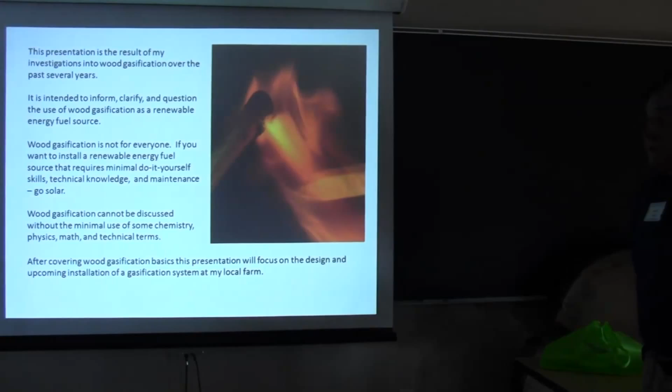This presentation is my investigation into this, and I've done a lot of research into wood gasification, most of it in the European arena. America hasn't done much with wood gasification, and there are no really good scientific, technical articles on it in the US. The National Renewable Energy Lab probably has the best information out, but if you want to research this, look at Norway, Sweden, Denmark, Germany. Europeans have done this for quite some time and really have the technical information about it.

My intent here is to give everybody some information about what this is, what it isn't, clarify some of the terminology related to it, and how this can be looked at as a renewable energy source. If you want to do this, you better be prepared to do a lot of tinkering and build a lot of stuff. This is not something I think the average person can get directly involved with. If you want renewable energy that you can just put there and it does its thing and gives you the feedback, I would say go solar.

Don't do this. All right, so to talk about this I'm going to have to talk a little bit about chemistry, and throw some numbers out here, and a little bit of physics, but I'm trying to keep it to a minimum. I've expressed everything here in both Celsius and Fahrenheit - everything in Fahrenheit is in red numbers, and everything in Celsius is in black numbers.

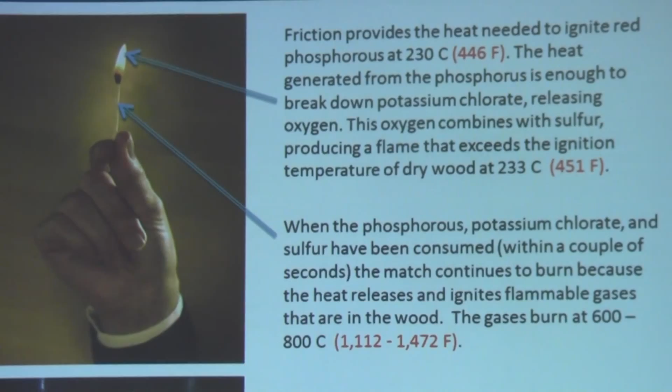So what happened there when we struck this match? For a long time, people didn't have matches - it was quite a lengthy invention, actually. It took 100 years to come up with the chemical compound for the tip of that match that allows, when you make that strike on that box, enough friction to produce enough heat to ignite the phosphorus that's on the head of that match. And that phosphorus then ignites what's called potassium chlorate, heats it up, and releases oxygen.

Because we're just shy of the temperature at which wood ignites, which is 451 degrees, and I'm sure we all remember the book Fahrenheit 451 - okay, that's where that came from. That's the temperature at which wood will spontaneously ignite.

So we strike this tip of this match, we produce enough heat to get this wood to burn with oxygen. But that is not enough actually to sustain this burning. What is happening then is that the heat produced from the striking of that match heats this wood up enough that the gas contained in that wood is being released into that flame. The flame on that match as it was burning here is roughly in this range, 600 to 800 degrees centigrade, or 1100 to about 1500 degrees Fahrenheit.

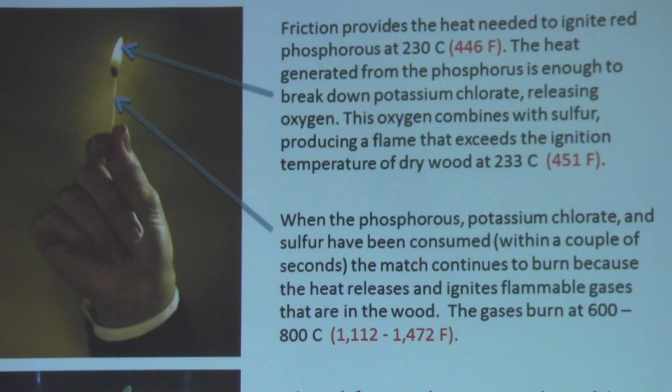Another example of that that's kind of interesting, you may have seen this. This is a common candle. Anybody know what the wick of that candle is made out of? Cotton. Okay, gasification can occur with any biomass - doesn't have to be wood. Wood happens to be one of the better ones, but cotton will work also. So we have paraffin wax surrounding that wick.

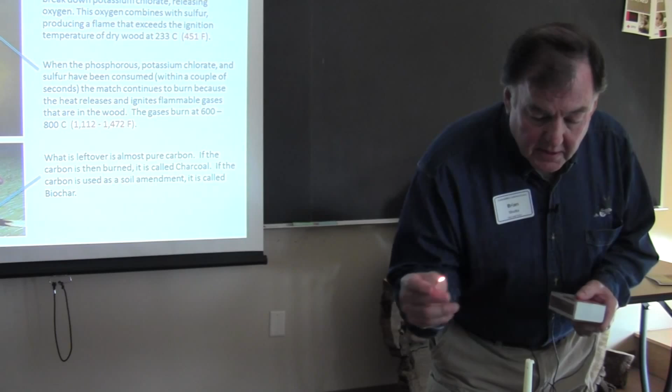The flame is burning - is that flame burning the cotton, or is that flame burning the paraffin? You sure? Okay, let me get it. It ain't coming up high enough. No, let's try it again. I think there's too much breeze in here.

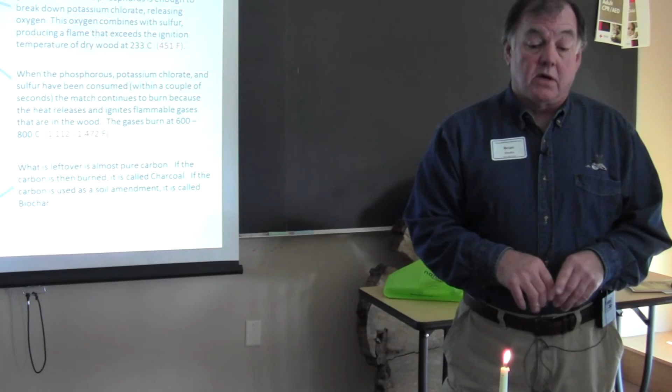Okay, so I reignited that candle without touching that wick. How'd that happen? The gas, same gas that was coming off that piece of wood, is coming out of that piece of cotton in that wick when I extinguish that flame. And that gas is flammable enough - I've gotten it, if you get in a real still condition, I can get about 2 inches away and reignite these candles like that. So we have gas coming here from both the paraffin and from the wick.

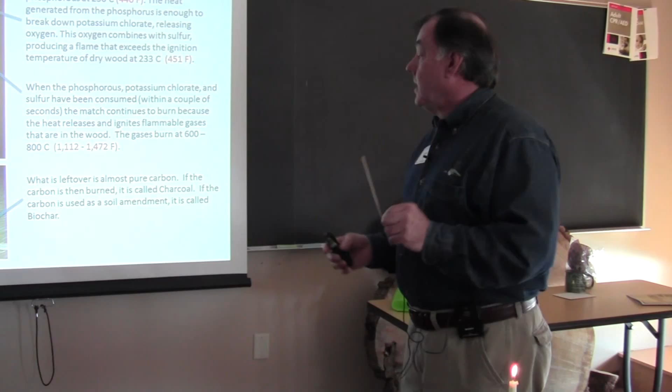So what's left over? We took that piece of wood, we ignited it, we baked it, we got it hot enough to release gas, and what's left over is this black char. Now depending on what you use that char for, it's got a couple of different names. If you're going to then burn the char, which is flammable, it's called charcoal, and we've all used charcoal briquettes. If you're going to use it in the ground as a soil amendment, that's called biochar. They are exactly the same thing. But you hear the word biochar now being used a lot - but it is charcoal.

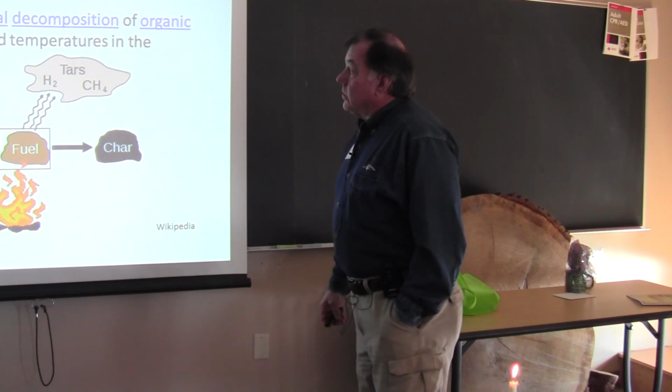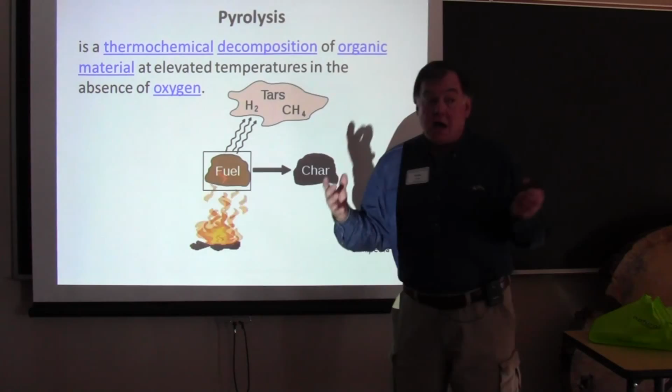So the chemical process here is called pyrolysis, and it is a thermochemical process, meaning it is a chemical process that is driven by heat. And we are decomposing that piece of wood rather quickly at an elevated temperature, and the best way to do it is without oxygen. Now obviously that match is drawing oxygen from around the room - the flame is actually keeping the oxygen away from the wood. So we have a heat source, we have a fuel source, a piece of wood. We'd like to put that fuel source inside of a box, an oven, and we'd like to heat it up and bake it.

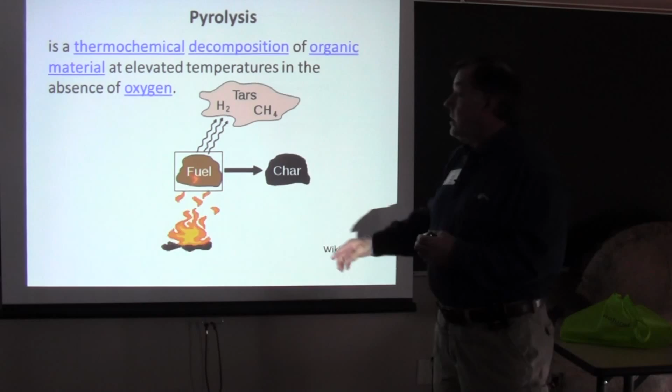And as it gets hotter and hotter and hotter, that piece of wood starts transforming. And when it transforms, it releases several substances. It releases some substances that are liquids - we call those tars. It releases some substances that are gases - those are the ones we're interested in right now. And then it also has a byproduct of biochar, most of the time, not all the time. We'll cover that in a minute.

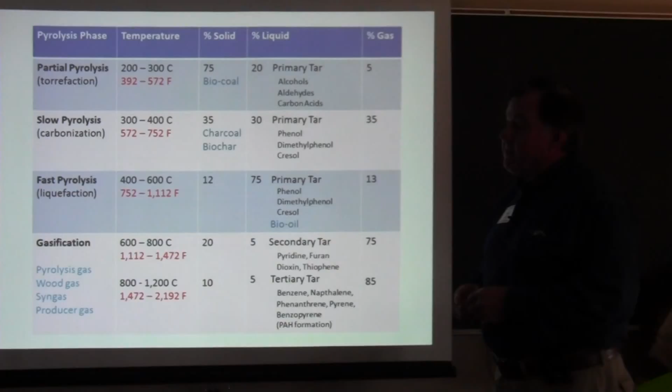So here's where it gets a little technical, but I'm going to refer back to this particular slide a lot, so we need to spend a little time on it. At about 200 degrees centigrade, or 392 degrees Fahrenheit, pyrolysis starts happening. This piece of wood that we're baking starts transforming, and in that temperature range it remains basically a solid, 75% of it, and it starts producing tars - liquids start coming out of it. These are the names we give those tars when we're in this particular temperature range. It also starts releasing gas, but not very much of it.

So we turn up the heat a little bit and start baking it at a higher temperature. The next phase is called slow pyrolysis, roughly 300 to 400 degrees centigrade. At that temperature range, we start producing a lot of charcoal, 35%, and we start transforming it less into a solid piece of wood and more into tars and gases.

So this phase is pretty equally split. These are the names of the gases, or liquids I should say, that we get here. We probably recognize one of these. Creosote? Okay, so cresol is the precursor to creosote, the basic chemical substance of creosote.

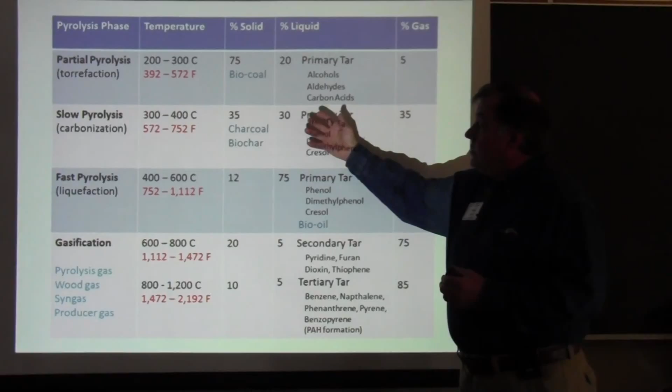So the chemical industry pyrolyzes wood at different temperatures depending on what they want to get out of it. If they want to extract oil out of wood, they use these temperature ranges. If they want to extract biochar or gas, they use different ranges. We're concerned with gasifying this piece of wood and using the gas, but at the same time we'd like to minimize the amount of tar and charcoal left over. We'll hit on that in a minute.

So let's go up one more step. We keep turning the heat up on this piece of wood and get up into the 600 to 800 degrees centigrade range. At this range we start producing what are called secondary tars. A secondary tar is a tar that you cannot detect. If I gave you a piece of wood and did a chemical analysis on it, you would not find those tars in it. Those tars are created out of these tars going through a chemical transformation due to the heat.

But we start producing a lot of gas, 75%. So that piece of wood is now being converted to a gas, and we'll look at that gas in a second. So let's keep cranking it up here, a little bit more.

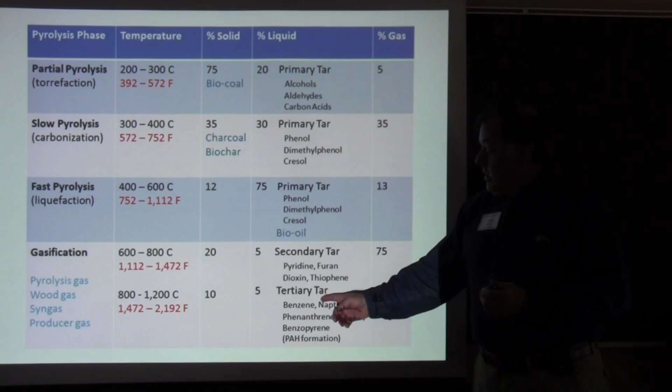Anybody know what the word tertiary means? Third. Okay, so we're producing now another level of tars that were not in that piece of wood. You could not detect them—the heat is creating them out of the existing tars. These are called tertiary tars.

And you may have heard this phrase—we'll cover it at the end—called PAH. Anybody know what that means? Okay, we'll hit it at the end. But these are the bad guys, the ones everybody doesn't want to create because of the amount of cancer-causing agents that are in them.

So there's kind of a sweet spot in this whole process of taking a piece of wood and pyrolyzing it into a gas, and in my opinion that sweet spot is right here. Because what we'd like to do is create the most amount of gas, the least amount of tars, and some amount of charcoal or biochar, without an excessive amount of ash created in the process. So I'm going to refer back to this—try to keep in mind the temperature ranges we're talking about and what's achieved at each one.

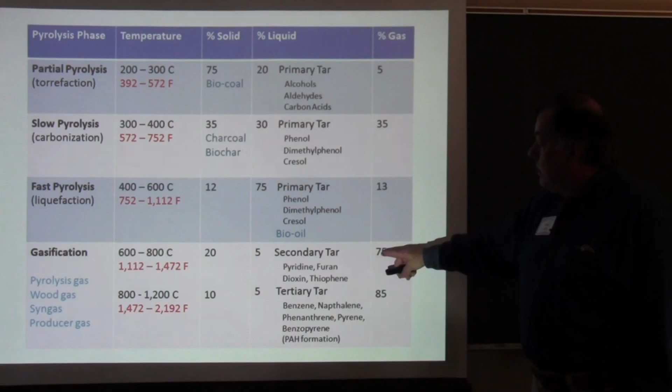So let's look first at this spot right here. The rest of this presentation will be on what we get if we gasify at this temperature. When you say tar, what do you mean by that? Okay, let's go to—I'll show you in a second.

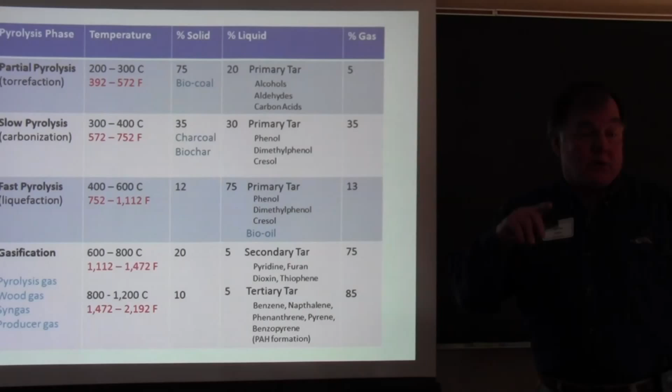Let's look at the gas first and then we'll look at the tar. So wood gas, that's one of the names for the gas. Let's back up one sec. There's a bunch of different names, and if you read all these studies, everybody doesn't use the same terminology. That's a big problem with this whole field. So when they say we're going to make a gas out of this wood, some people call it pyrolysis gas, wood gas, syngas, or producer gas. They are essentially all the same thing.

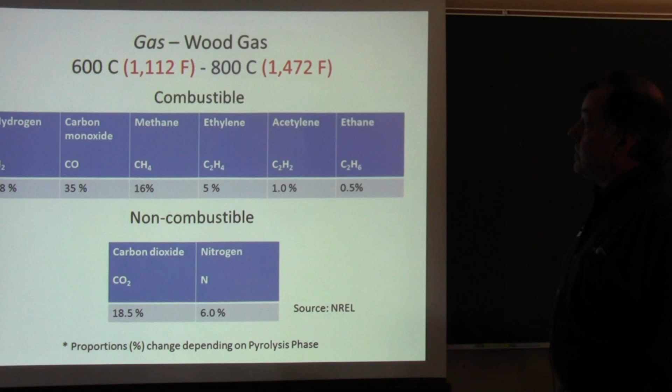So what does wood gas look like at that temperature range? This is what it's composed of. We talk about hydrogen cars and the hydrogen economy and hydrogen renewable energy. Wood gas has a lot of hydrogen in it. Carbon monoxide is a flammable gas. Methane, same thing you produce in natural gas, biodigesters, is another major constituent. Some other gases that aren't real prevalent but are very powerful are ethylene, acetylene. Where do we use acetylene at?

Welding, right? Is that the same for different tree species? The chemical properties that you get from burning different tree species will produce different percentages of this. This is based on a hardwood, a dried hardwood. And it's another whole science, what wood you put into your gasifier and what kind of gases you get out of it. And then there's also ethane in here.

So those six gases combined are what cause the combustion in wood gas. There's also some non-combustible gases that come out: carbon dioxide, about 18%, and nitrogen, about 6%. This came from NREL, their studies on wood gasification. Remember, this is at this particular temperature range. If you gasify at the other ranges, the same gases come out, but the proportions are changed.

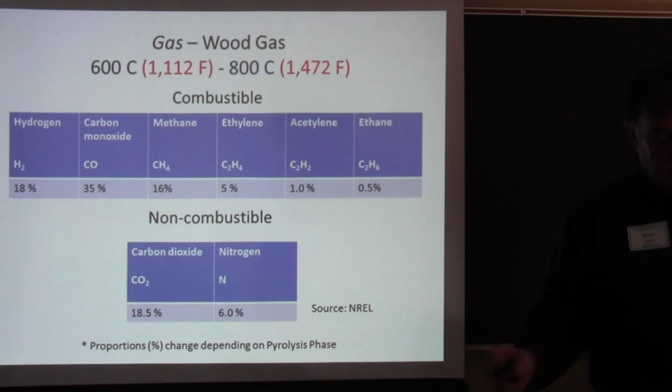So what is tar? Tar is the liquid that comes out. Remember, we're doing these different temperature ranges, starting down here at 200 degrees centigrade, and we're going to stop here at about 600 degrees centigrade. So if I take a piece of wood and cook it at about 200 degrees centigrade, the tar I get out of it is basically lighter than water. It's an oil, lighter than water. The main one we're all familiar with, there's a bunch of them, is turpentine. So that's how the chemical industry gets turpentine out of a piece of wood. They pyrolyze it at a low temperature, and that turpentine comes out.

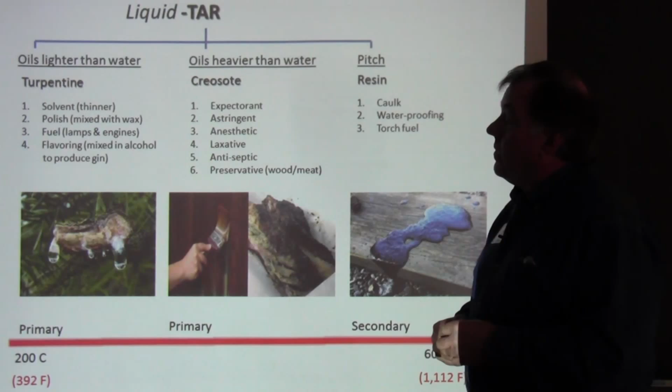So what do we use turpentine for? All kinds of things. It's been a solvent for a long time, a paint thinner, a polish. It's mixed in with wax. It's been used as a fuel in lamps and engines, and it's been used to flavor gin. In fact, for a long time, gin was made that way.

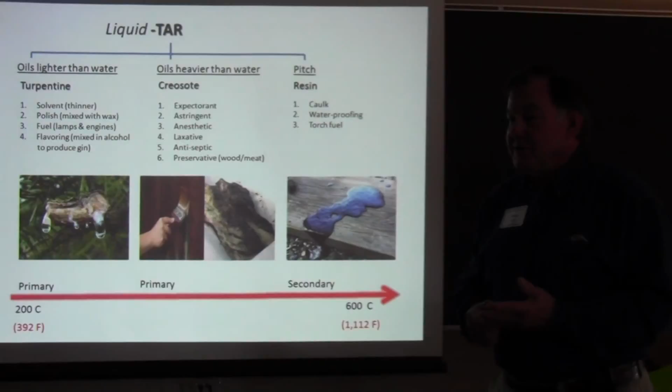So let's look at the one for engines for just a second, just a little fun thing on the side. When Honda made his first engine, his own engine of his own design, he ran it on turpentine. So when Henry Ford made his first engine, anybody know what he ran it on? Alcohol. Okay, when Rudolf Diesel made his first engine, what did he run it on? Vegetable oil, peanut oil in particular. All naturally derived substances. When Ferdinand Porsche made his first Porsche, what did he run it on? Electrons. The very first car Ferdinand Porsche ever designed was an electric car.

So if you look at those four, the leaders in the automotive world, and you look at what they thought they were creating, they all envisioned that they were creating an internal combustion engine that would run on a renewable fuel source produced by farmers in particular. Their concept was never that they were going to be run on fossil fuels.

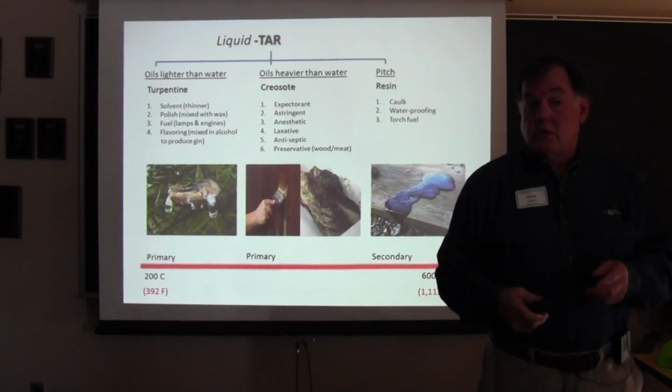So, low temperature, we get turpentine. Turn up the heat a little bit here, and we start getting those oils coming out, cresol, creosote. Creosote's been more than just a bad thing going up our chimneys, though. It's been used as a drug for a long time, and in Japan is still marketed and sold as these drugs. It's also been used as a wood preservative and a meat preservative. In fact, you can buy bottles of creosote that you can put on meat.

The EPA, if they had their way, would bar all of us from ever eating anything that looked like this, because they say that all the bad stuff in eating a piece of meat—you've all heard this about not eating charred meat—is that the charring on the outside is the creosote that's in the meat or been applied to the meat. So we turn it up a little bit higher, and we're still up here.

We're just starting into this secondary phase of tar production, and we start getting this thick, gooey stuff come out, commonly called pitch. We used to be able to buy pitch in cans. We used to use pitch in place of tar to fix our roofs, things like that. It's used as a caulk, for waterproofing. It's soaked into cotton and used as torches, hand torches.

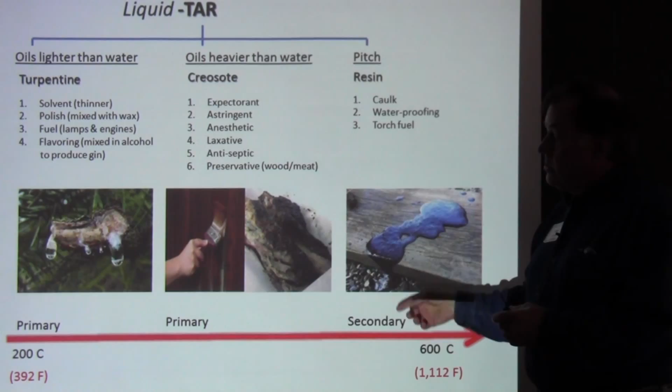So those are the tars. Industry likes to have tars. The application I'm going to talk about here in a few minutes is application of wood gas in an internal combustion engine. Internal combustion engines do not like this—they do not want it going into them at all. So if you are processing wood at this temperature range and producing these kinds of tars, they will quickly destroy an internal combustion engine. In fact, to even begin to use them in an internal combustion engine, you have to take those tars out. So you have a gasifier, and it's going through a filtration system to remove those tars before it goes into the inlet of that engine.

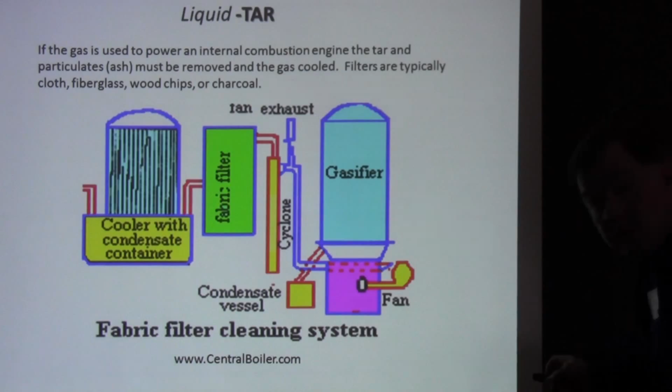So the other thing that comes out is the solid—I broke it off, the char on the end of the stick. And people are using it as a soil amendment. Biochar is looked upon now as one of the best things you can add to the soil to improve its fertility. It also stores carbon.

So if we back up to that chart I showed you, at the temperature range that I'm talking about here, how much char did we have left over? I think it was 20%. So if I put 100 pounds of wood into my gasifier, I'm going to get about 20 pounds of charcoal or biochar out of it.

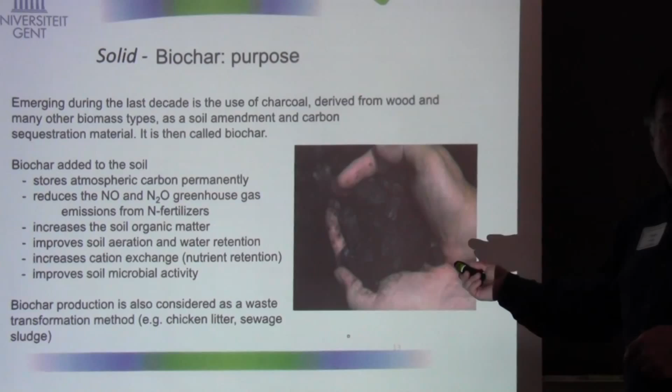What can I do with it? Well, I could burn it. I could use it as a filter media—we have all kinds of filters that use charcoal. Or I can put it into the ground. In the ground, it does some very interesting things. This is carbon, pure carbon—carbon that didn't go into the atmosphere. It's carbon left over from the wood, and we're going to put it back in the ground.

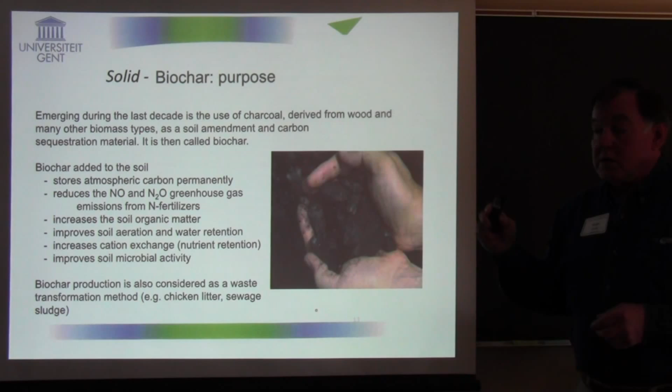When it goes into the ground, it does a few things. One of the things it does is it immediately locks up nitrogen that's in the ground. And I've read several studies that say that one of the ways we can improve our factory farming is to put more biochar into the soil, to lock up more of the excess nitrogen that's been applied and that is running off.

It increases soil organic matter, aeration, and water retention. You know, charcoal is basically like a sponge—it has lots and lots of surface area in a very small space. It locks up other compounds inside of itself, and the soil microbes like that. It's all right there where they can get to it.

So biochar is a byproduct. You gasify at different temperatures. If your goal is to produce biochar, you're going to do it at a lower temperature. You can produce more of it, but you're also producing more of the other things—the tars and the gases.

So how do we gasify? Well, it can be as simple as take a can, put a bunch of wood in it—wood chips, sawdust, a chunk of wood—put a lid on that can, make sure it's metal, and put it in a fire. It will bake that piece of wood and release the gas out of it. And when you get done, you'll have a black chunk left over.

Right now my son is experimenting with packing a steel tube about that long, about that big around, with sawdust, with a steel lid on it. He puts it in a wood fire, and you can see the flames come out of the cracks of the lid—they'll shoot out the side of the lid that far. Leave it in there for an hour, maybe two hours, and the wood—or sawdust—that was packed in tight will have reduced down to about 60%, and it'll be fine black charcoal.

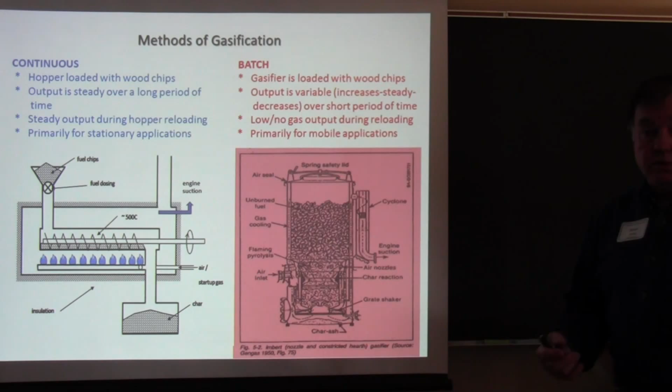So that's the simplest way to do it. There are other ways of doing it. The problem is that when you pack that container full and put it in the fire, it produces gas until the gas is gone from the wood that's in there. Then you have to recharge it—take it out, dump it out, pack new sawdust in it, and put it back in. That's called a batch process.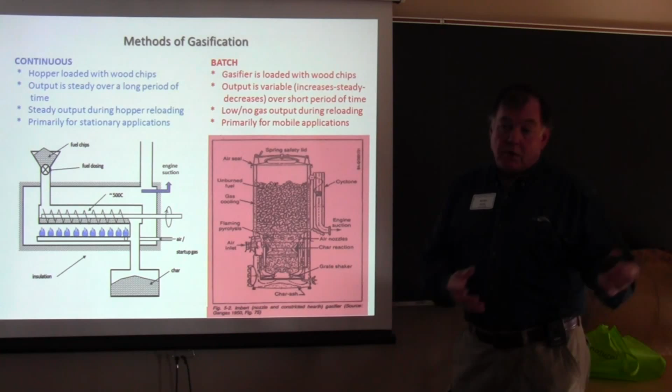We're doing a batch at a time, like baking a batch of cookies. So the batch process is where we load it with a quantity of wood. The output is variable because while we're unloading it and reloading it, no gas is being produced. We put it in the oven, gas production starts going up, levels off, and then we have to recharge it again so it drops down. That's called the batch process, used mostly for mobile applications.

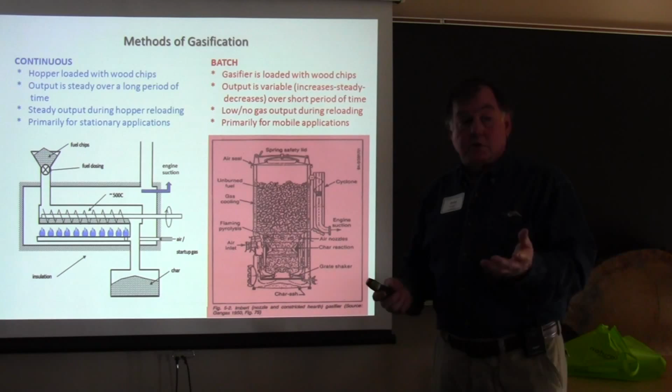A stationary application has the advantage that you can use what's called the continuous process. You can feed these wood chips into the gasifier at a steady rate, just like fuel oil flowing out of your fuel oil tank into your fuel oil furnace at a steady rate. The one we're going to look at today is this one. I want to show you a few examples here.

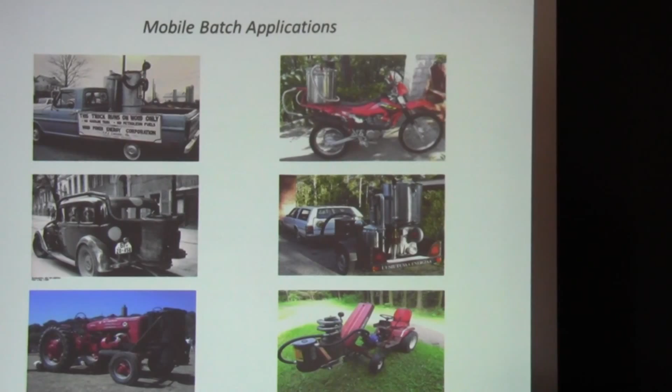This is gasifiers being used for transportation purposes. If you read Mother Earth News or any technical magazines, there are all kinds of articles now about putting gasifiers on vehicles. It was really prevalent, reaching its highlight at the end of World War II because we severed most of Germany from having any fuel supply. People got very crafty, and I've read that as many as 50% of the war vehicles at the end of World War II were being run on wood gasifiers because they had no other fuel to use.

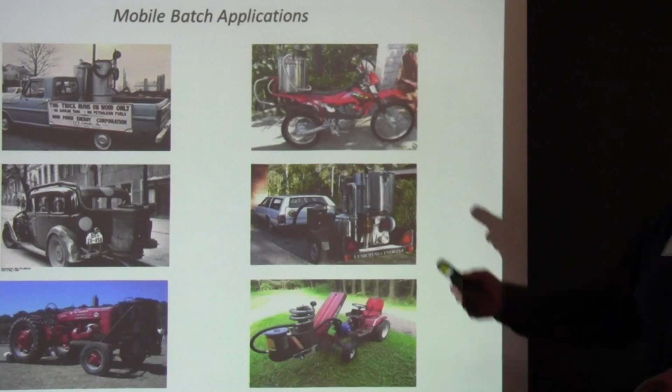So they put a tank on the back, a tub, packed it full of wood, put some wood under it, used that wood to heat the wood in the canister, ran a tube up to the front of the vehicle, sucked it into the intake manifold, and drove down the road.

Some modern versions of that involve putting them in the back of pickup trucks. But you'll notice that by the time you load some wood in the back of that pickup truck, it's not much good for anything else. It takes a lot of space on a mobile vehicle to do wood gasification and drive down the road. They've even done it on motorcycles—I would not want to lean back on that motorcycle.

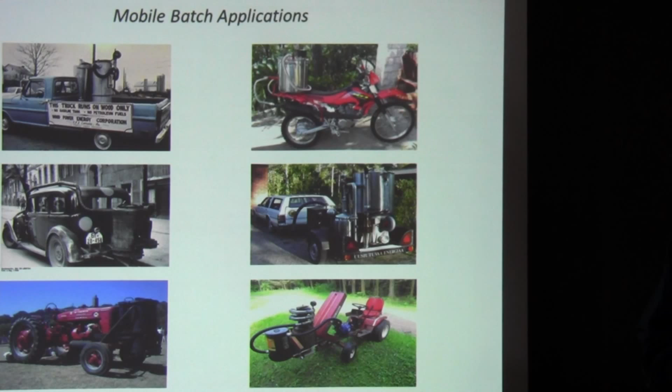This is kind of a modern version of this. It's all self-contained on a trailer with a tube running up underneath the car to the intake manifold, so you can drive around. I could possibly see it on a farm application where you're not driving on the road and don't have to worry a lot about having trunk space and how convenient it is. And this is a garden tractor that has one on it.

One of the reasons they could do it back then, which is kind of interesting, is that during World War II, most car engines were of what's called the flathead design, not overhead valves. The valves were in the block.

And remember all those nasty tars I was telling you about? Well, they weren't doing much to filter those out, so they were sucking all these tars into the engines along with the gas. After a while, the engines would quit turning because they were gummed up inside with tar. To service a flathead engine, you just take the bolts off the head and pull the head off—it's right there, all the valves are clearly accessible, the head's accessible. I've read that they were pulling the heads off of these cars once a month and cleaning the tars out of them to keep them running.

So think about that if you're thinking about doing an engine application.

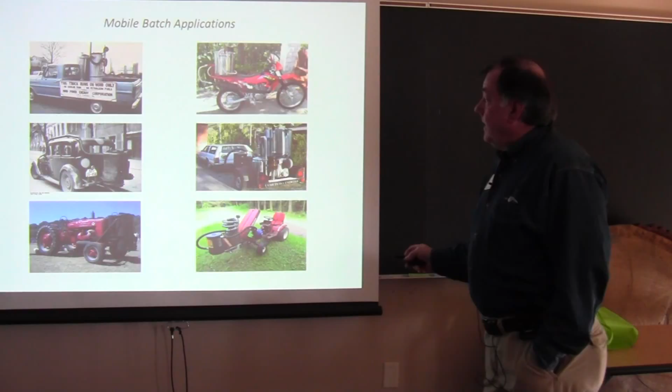How many people have an EPA-rated wood furnace?

You may have read recently that about two weeks ago the EPA announced that rated gasification wood furnaces have been on the market since 1988, and they're now trying to make it so no manufacturer can produce a wood stove or furnace that doesn't meet these qualifications. They're getting a tremendous amount of pushback on this.

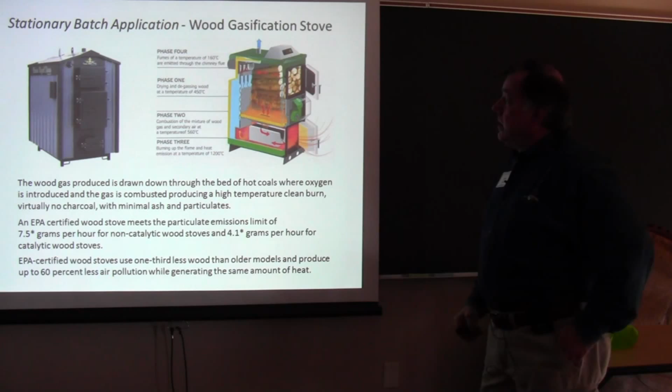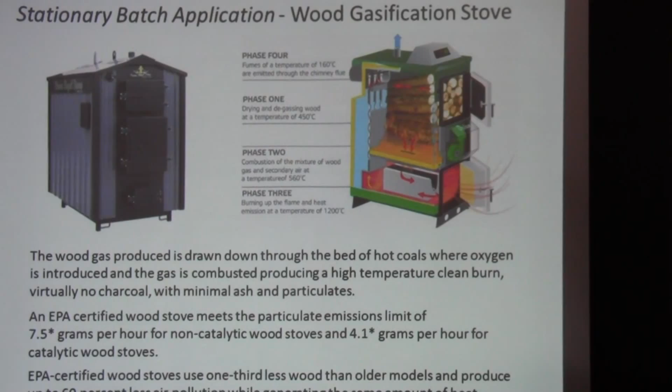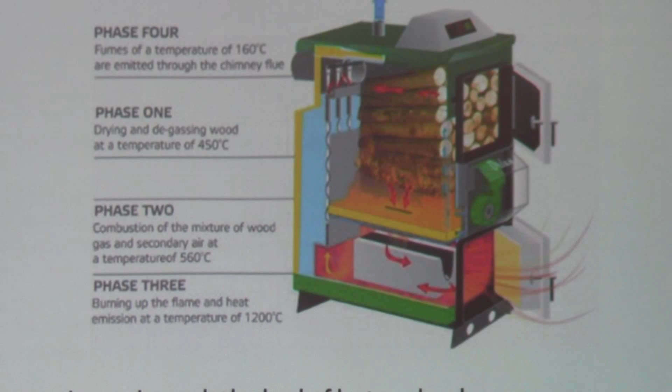So how does an EPA-rated wood stove work? Essentially it's a batch process. You load a bunch of wood in, get it burning, and the bottom part is on fire, then you choke it off, cutting off the air and preventing it from escaping into the atmosphere. The gases that come off the wood accumulate inside the stove. At a preset time, a fan turns on that sucks those gases out of the chamber, down across the glowing embers, introducing oxygen at the same time, and burns those gases, which then goes out the smokestack. An EPA-rated gasification wood stove is far less polluting than a common wood stove and uses about a third less wood to produce the same heat.

They also cost $1,000 to $2,000 more to buy new, but they like to see everybody who burns wood have that on their stoves. So in this case, we're just taking the gas and sucking it back down across the fire.

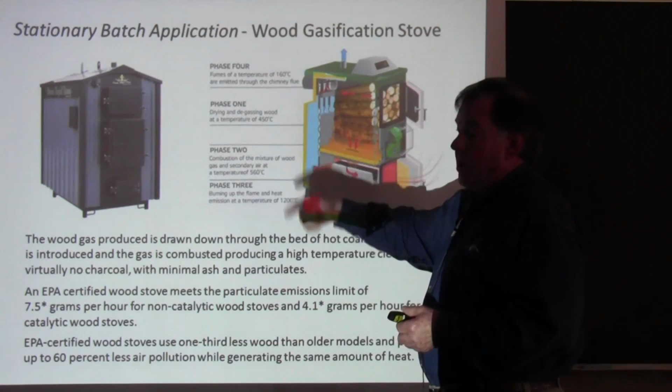What is the heat exchanger? Most of these have coils in the back part, where the heat, as it's going out, heats the water inside those coils and circulates it back to the house.

So this is a stationary, continuous application. How can we make this run continuously for a long period of time? One way is with a big hopper filled with wood chips, which need to be a fairly uniform size, somewhere between about a half inch square to about 2.5 inches square. That's so we can feed those wood chips into a gasifier with a screw, an auger, which is what this is right here.

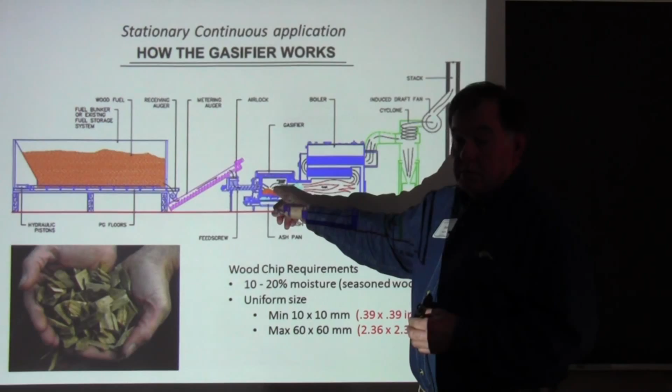So you have a hopper full of wood chips. We bring those chips down into the auger, which in this case feeds into another auger that goes into the gasifier. This gasifier is just burning those gases and creating steam, and taking that steam to run a generator, in all probability. That's another option instead of running it through an internal combustion engine.

There's a company in Grand Rapids called Heat Transfer International, and they have a huge gasification project like this up by Howard City at a turkey farm. Instead of burning wood chips, they're burning turkey manure, taking the gas from it, injecting it with hot air, and using it to spin a turbine and generate electricity.

So just like with your wood stove at home, these wood chips should be very low in moisture. You should not be burning wood that's over 20% moisture in any wood stove under any circumstances. That's considered seasoned firewood, at least 6 months, preferably a year, drying from the time it was cut from a live tree. How many people do that? Good, good.

All right, so I'm going to describe to you how I'm going to apply this at my farm, what my goals are, what the system looks like, and you're all welcome to come over and help build it or look at it.

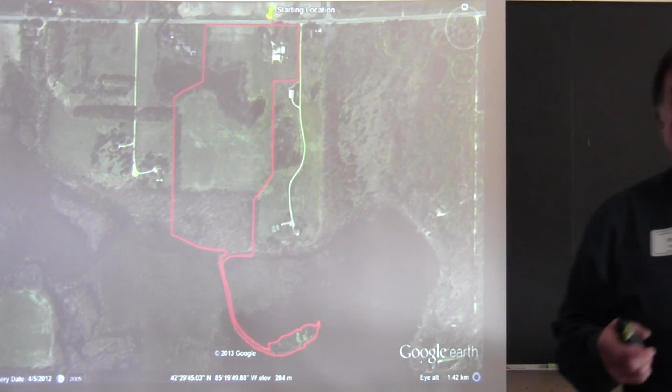So this is my farm. This is the corner of Piper Road and Cedar Creek Road, 43 acres. This is Fair Lake out here, this dark spot. Fair Lake has the distinction of having the southernmost pair of nesting loons in Michigan.

There's an aerial photograph of my farm. The reason I wanted to show you this is that this is my house, this is my shop—looks a little different now, but basically the same size. There was originally a barn right here, straight south. So this barn is about halfway between my house and my shop, the foundation of that barn, and it's on a south-facing hill.

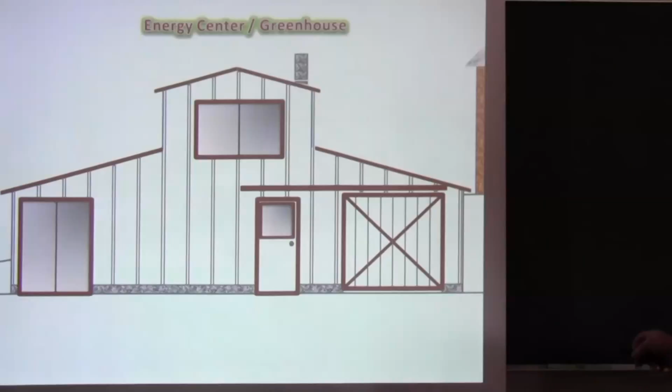And the building that's going to go there is going to look like that, like a horse barn kind of. That building is 36 feet wide this way, and it'll be 72 feet long in the other plane.

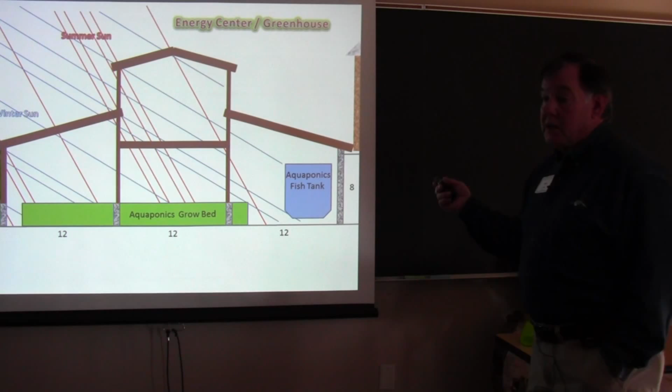Half of it's going to house a greenhouse that'll contain an aquaponics program. There are fish tanks located on the back wall, grow beds up on the front where the windows are. The water is circulated from the fish tanks through the aquaponics grow beds and back. That water will be heated by this process, and the building itself will be heated by the waste heat from the engine of this process.

I'll go a little faster. So this is looking at it from the south. That building will sit right here in this hill, so it'll be earth sheltered. That's an overhead view of what's going inside this building.

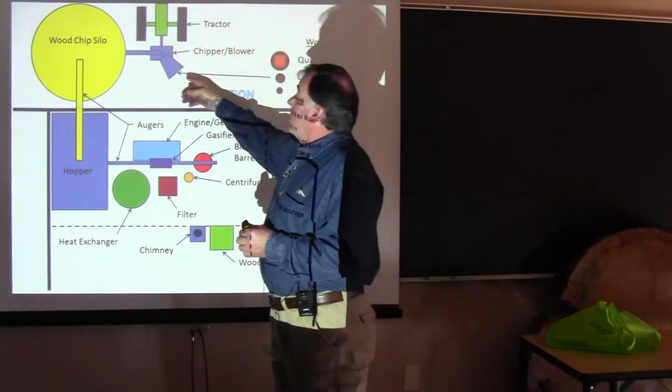I'm going to skip through here. So this is the gasification process. I'm putting a silo right next to this building that's going to contain wood chips. I have a tractor with a chipper shredder on it. The wood we harvest off the property will be fed into that chipper. We get this wood from—we have a sawmill, so we end up with quarter rounds around the outside of the logs, limbs off of trees, small branches, or what's called coppicing.

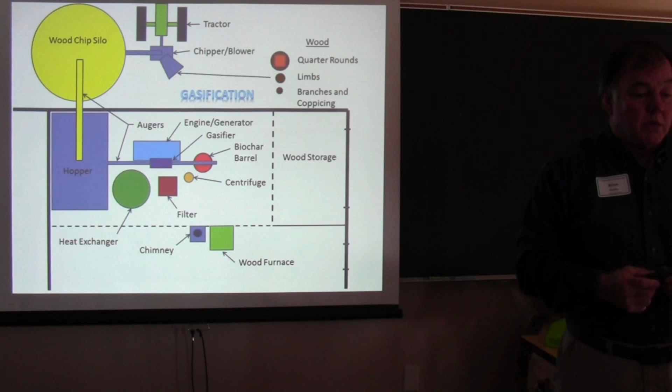Anybody know that word, coppicing? You chop the tree down, let the saplings grow up, and then harvest those along the time when they get bigger. It's chopping a tree down, but it's also intentionally growing trees that grow very fast. When they get to the point they're 5-6 feet high and about yay big around, you cut them off and use that wood for firewood. You can grow your own firewood much faster and more efficiently than cutting down big trees.

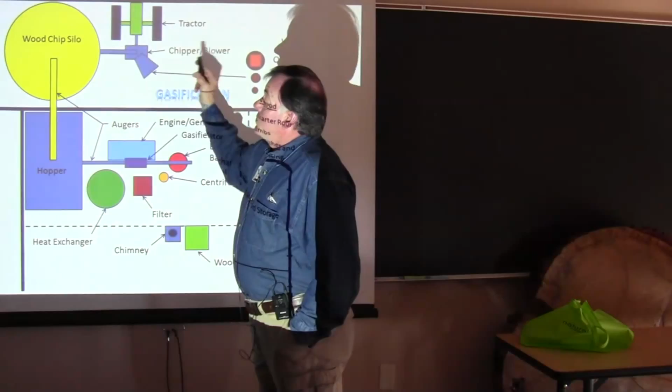So we're in the process of planting trees for coppicing. All that wood gets fed into the chipper shredder, which blows it into the silo. The silo moves it out into a hopper that's inside the building—I have pictures of all this in a second. That's all done with augers, moving these wood chips. The wood chips come up here as a gasifier, which is a heat chamber that's around that auger.

The auger's inside a tube, and there's a heat chamber around that. There's an engine and a generator here that's producing the heat and the electricity. We're going to collect the biochar coming off of this in barrels.

We're going to clean that gas going through a centrifuge. The centrifuge just takes that gas and spins it around the inside of a container. The heavy particles fling out against the walls of the container and fall down. The finer particles have to be filtered out through some kind of filter media, like wood chips, charcoal, or cloth. We're going to try to recycle all the fine particulates we get out of this through the filtering system.

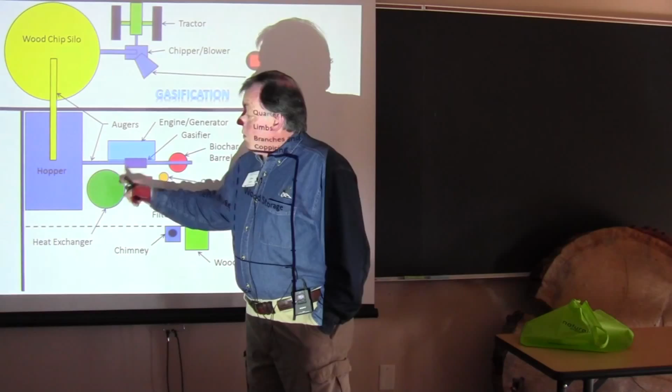This is a heat exchanger. The water going through that aquaponics system, the water going to my house, and the water going to my shop are all going to meet here and be heated by this process. And I have a wood furnace for backup, since this doesn't work like I thought it was going to. This is a side view.

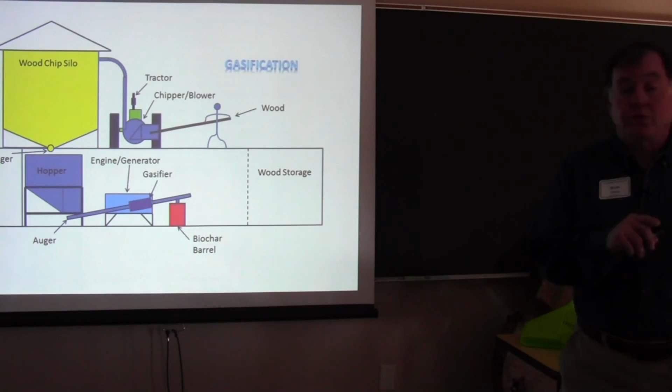Where in the process do you bring the moisture content down to 20%? Two places. One, if I'm cutting wood that I'm coppicing, it has moisture in it, but most of the time I'm cutting wood that is already dead in the woods. It's been dead for a year or two, so it's already got a very low moisture content. It's also being put into this wood chip silo at a very early time of year, so it dries inside the silo. The silo is vented. I've actually even thought of pumping heat through the silo to help dry the wood.

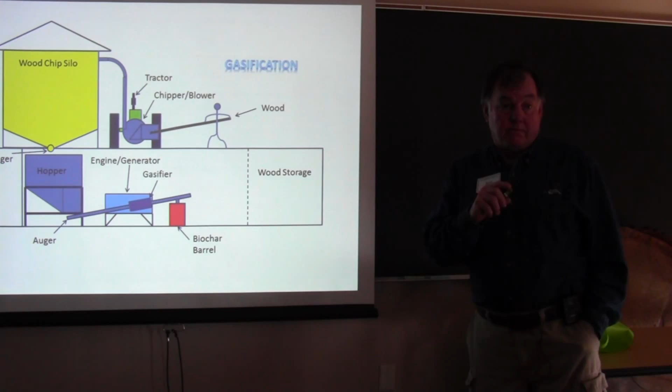Okay. So this is a side view. This is my son, not me.

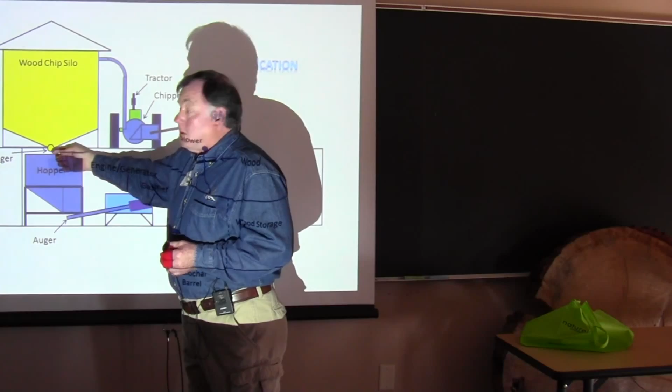Pushing a piece of wood into a wood chipper. The chipper chips it and blows it into the silo. The silo fills up. This silo, I'll get into that in a minute, maybe. This auger brings it in here, drops it in this hopper. The hopper is a grain wagon, a common farm piece of equipment. Another auger takes it out of that hopper. The gasifier right here is being heated by the exhaust from the engine.

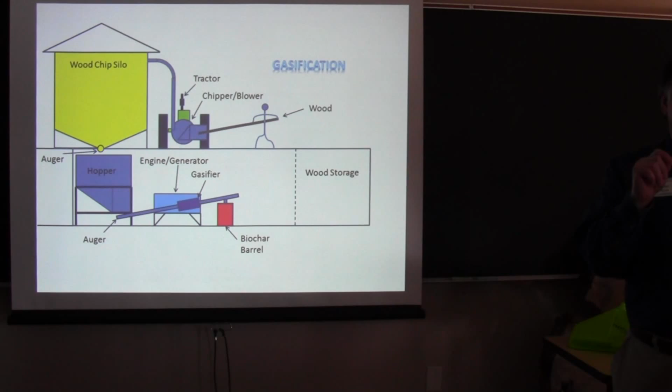So remember the temperature range we were talking about, 600 to 800 degrees centigrade? That is exactly the amount of heat that comes out of the exhaust of an internal combustion engine. So once you get this engine going and running, it'll run on the gas that's being produced, and it'll provide the heat to make the gas. It's a self-perpetuating process.

Does that take all the heat? Is all the heat transferred into the gasifier, or is there still heat that you can put back through your silo and dry it out? Hang on, we're getting there.

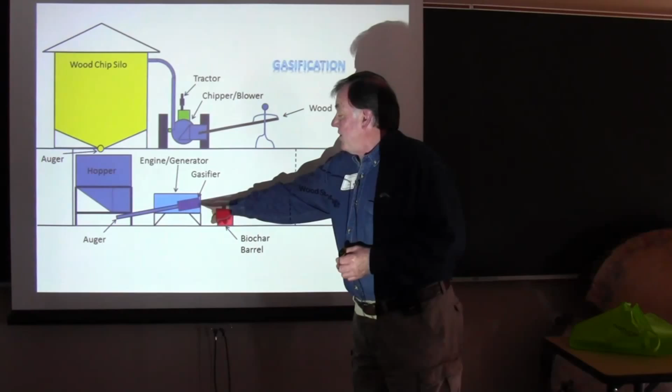Sorry, we're getting there. So the wood goes through here, it's in a screw, remember, inside this tube. It gets heated, it's turned into charcoal basically here. Comes up here, falls through a hole in the bottom of the tube into a barrel, and it's collected as biochar. Put it in a manure spreader and spread it on the fields, if that's what you want to do with it.

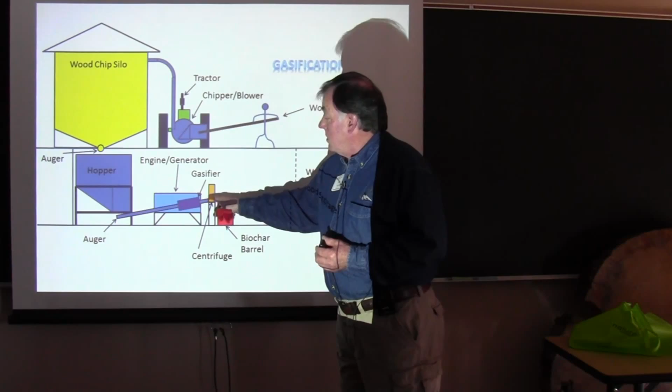Okay, so the gas. There's a centrifuge right there. So the gas that's collected off of this goes into a centrifuge, then it goes into a filter, and then it goes into a heat exchanger. Okay, so that's the gas coming off of the gasifier. The exhaust gas also goes into that heat exchanger. So after I run the exhaust from that engine through the gasifier chamber, it's then going to go into that heat exchanger. I'm going to remove the rest of the heat I can get out of it there before it goes out into the atmosphere.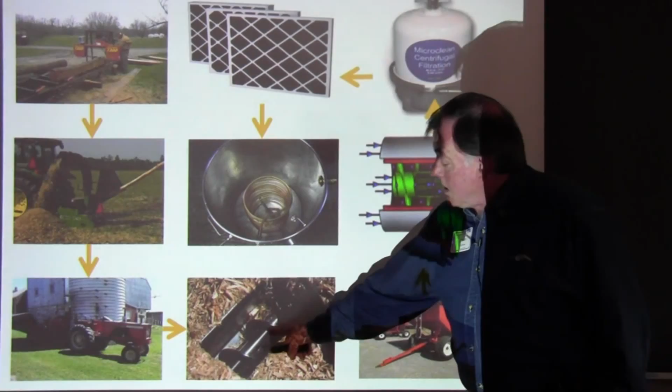Oh, over here. So let's look at this as pictures. Okay, sawmill, cutting quarter rounds off of it, runs into a standard chipper anybody can buy. Instead of just piling the chips on the ground, blowing them into a silo. Inside the silo is an auger. Wood chips are falling down into the auger. The auger's augering it into the hopper that's inside the building, which is a grain wagon. You can buy these dirt cheap. They're sitting all over the countryside. Most of them have an auger on them.

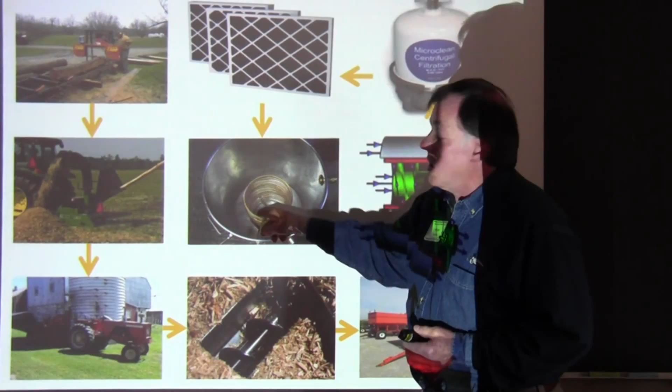That's what this is. I couldn't get a good picture of a gasifier. This is the screw inside there. Around there is a chamber that the exhaust is being pumped through, heating that chamber. The gas comes out, goes through a centrifuge, goes through a filter, comes into a tank that is the heat exchanger. So the gas will be going through the copper tube. The tank is full of water, and it's heating the water. That's where I'm exchanging hot water to my house, to my shop, to the aquaponics grow beds. You look puzzled, Larry. No. Oh.

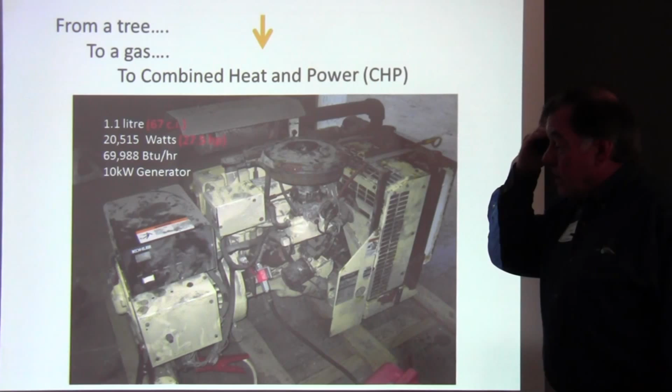And then it goes from there to this. This is the generator that I bought. It came out of an AT&T service truck. It has 200 hours on it.

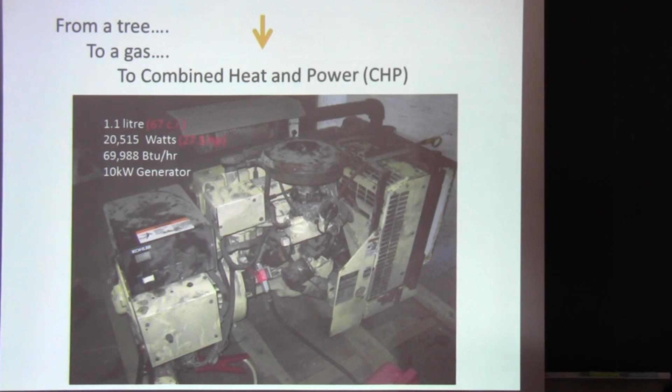These units are rated for about 15,000 hours before they need to be rebuilt, so you can figure out how long you can run it—a couple of years at least before you have to do any major overhaul. This is a 1.1 liter unit, 67 cubic inches. It puts out 69,988 BTUs an hour, and it runs a 10 kilowatt generator.

So let's play with those numbers a little bit and see if I can do what I think I'm going to do at this farm with this unit.

So, in an average internal combustion engine, where does all the energy go? You go down and buy fuel—let's say you pay $3 a gallon, and you put $3 of fuel in your car. How much of that energy is actually causing movement of your car down the road? About 30%. Actually, you're doing really good if it's 30%. It's between 25 and 30%.

Where's all the rest of that energy gone? It all went out the water jacket of that engine, and also out the exhaust pipe—out your radiator and out your exhaust. So when you're driving down the road and you put that $3 of fuel in your car, you're throwing $2 of it out the window, and only $1 of it's making that car move down the road.

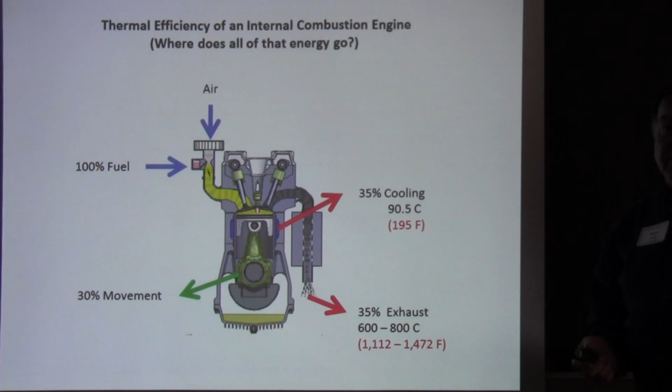So we'd like to capture some more of that. It's hard to capture it in a car, though. But when you've got a stationary engine, you can capture that heat pretty easily. I'm pumping this heat from the exhaust and the heat from the gasifier into my heat exchanger. So let's play with some numbers on this.

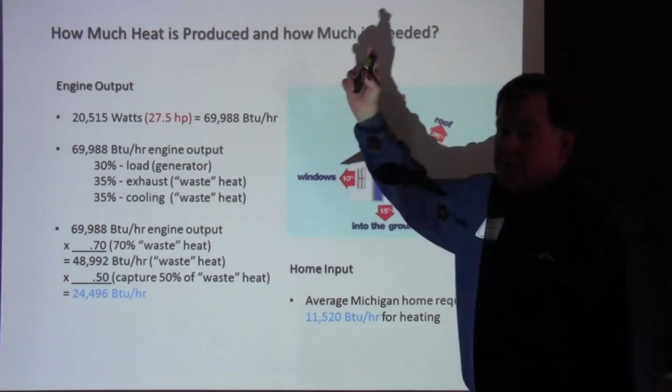How much heat is produced? My engine unit produces roughly 70,000 BTUs an hour. We're throwing two-thirds of it away in a car, so let's multiply that by two-thirds roughly—now we're at about 49,000 BTUs an hour worth of waste heat. If I can capture even 50% of it, that means I'm capturing roughly 25,000 BTUs an hour.

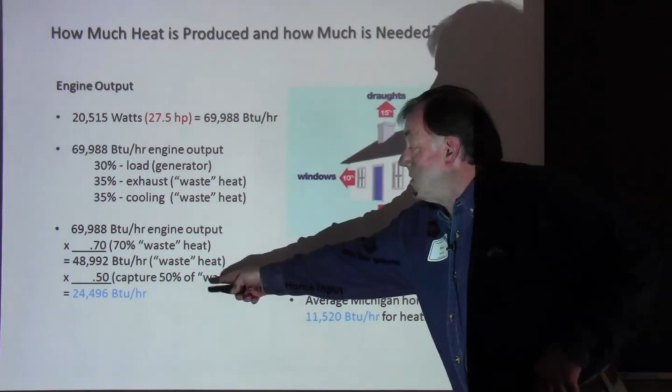Most of these systems in Europe are capturing 70 to 80%. I'm being very conservative here—if I can capture 50% of it, that's how many BTUs an hour I can get. The average home in Michigan requires 11,520 BTUs an hour to heat. My home, I guarantee, takes far less than that. Same with my shop, and the same with the building that this is housed in. So I think I've got enough heat to do all the things I want to do.

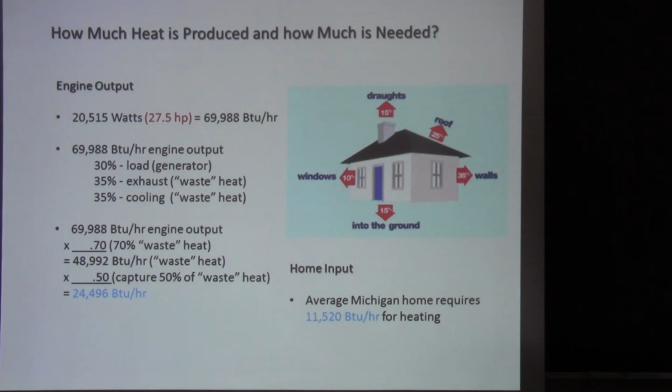How about electricity? Anybody know how much electricity your house is using? Too much. Will a 10 kilowatt generator run your house? Yeah—you better, if it won't, you better be moving. A 4 to 5 kilowatt generator will run most homes, even ones that are fairly energy intensive. So I think I've got enough electrical capacity to run my home, this shop, and the building too.

There are some ways you can improve this efficiency. It turns out that wood gas likes to have a compression ratio that's right in between a gas engine and a diesel engine to get the maximum power back out of that wood gas. So one of my phase 2 operations—I used to build race engines, and I built a lot of engines with this compression ratio—so I think I can take my little generator and hot rod it to make it produce more power out of the same gas.

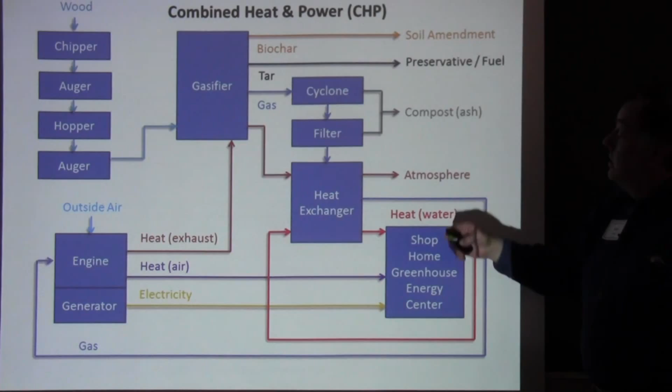One thing I haven't talked about is what comes out here. I'm recovering everything else here. I can use the tars as a fuel. I can use them as a preservative. I can use the biochar in the ground. I can use it as a filter media. I can burn it. But what's coming out of the exhaust pipe ultimately back into the environment?

I went through a calculation. If I ran this generator continuously for 6 months at maximum output, 10 kilowatts, it would take 9.6 cords of wood. The average home in Michigan right now to heat is 7 to 8 cords of wood, just to provide heat. Full cords.

So what's coming out the exhaust pipe? Not too much. One of the worst things that's coming out is nitrogen oxide. That's what all the car manufacturers are so concerned about, that's why we have catalytic converters and all this stuff. Turns out I could go down to the local junkyard, buy a catalytic converter off a small car, put it on there, and I'd be fine.

But let's put this in perspective. Where does nitrogen oxide in the atmosphere come from? Most of it comes from the nitrogen we apply to farmland, the vast majority of it. Very little comes from internal combustion engines burning biomass. I don't think I'm too far off polluting the planet there.

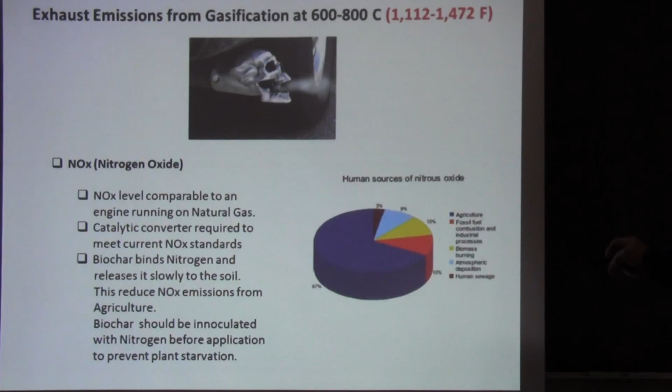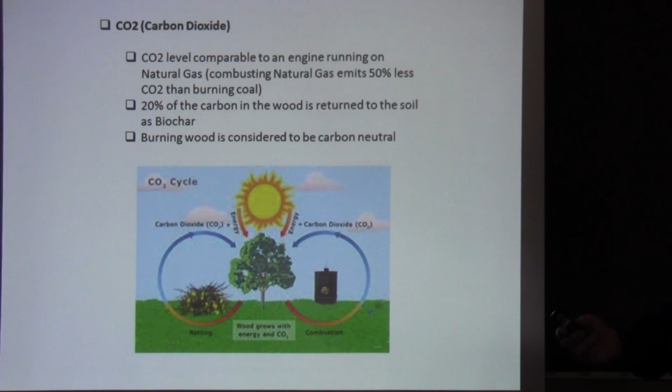Plus, I'm capturing 20% of that carbon and putting it back into the soil. Plus, burning wood is considered to be a carbon neutral activity anyway. So am I really contributing to carbon pollution? I say no. That's controversial, but the general consensus is it does not add to the carbon cycle.

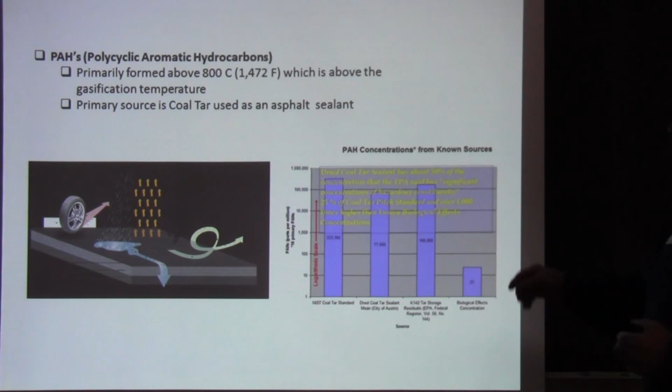The other thing is, where do the bad guys come from most of the time anyway? It comes from burning coal. And right now the EPA is going to ban coal-based driveway sealers - that'll happen this summer - because the vast majority of PAHs being released into the atmosphere come off pavement that's being recoated with coal tar, not asphalt. Some states have already banned it, and most places will sell you a driveway sealer that is not coal tar based. So that's coming down the road too.